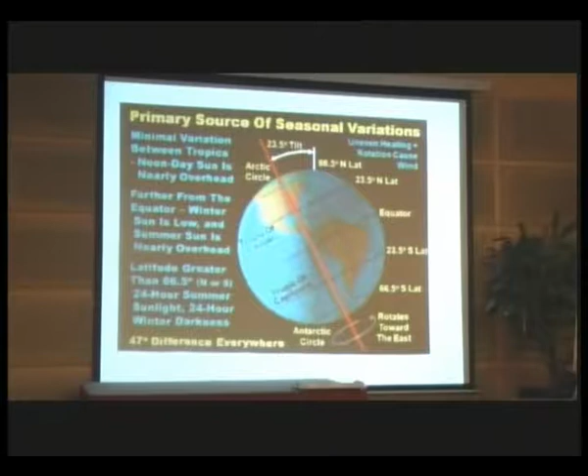Okay, like Dr. Tan mentioned, the world is rotating, it is at a tilt of 23.5 degrees, and because of the tilt, we have variation of the position of the sun throughout the year. Every day the sun comes out from the east, moves up, and then sets in the west. But throughout the year, it moves from the south to the center, to the north, and then back to the center, to the south again. This is because of the tilt of the earth. And we have translated this into what we call a solar chart.

And with this solar chart, we are quite lucky because we are near the equator. So it is fairly balanced. The number of months the sun is in the northern hemisphere is almost equal to the number of months the sun is in the southern hemisphere. But if we are in London, this one will be more like that, it will be down. Whereas in Australia, in the south, it will be more curved outwards. It is due to the position of the location.

And traditionally, we use a shadow angle protractor to find the angle of the sun, the position of the sun in terms of vertical and horizontal location. Of course, this is some data about Malaysia. I don't have to go through this. Okay, let's go to the first strategy, orientation.

As we said earlier, we try to avoid facing the east and west, but we cannot avoid having the walls. So we try to avoid the openings. We cannot avoid the roof from facing the sun, because the roof is the largest area for a low building. For a high rise, it will be slightly different. For a low building, the roof is the largest area that receives the sun, and therefore it is important to consider insulation, not only to the roof but also to the walls, especially the walls on the west.

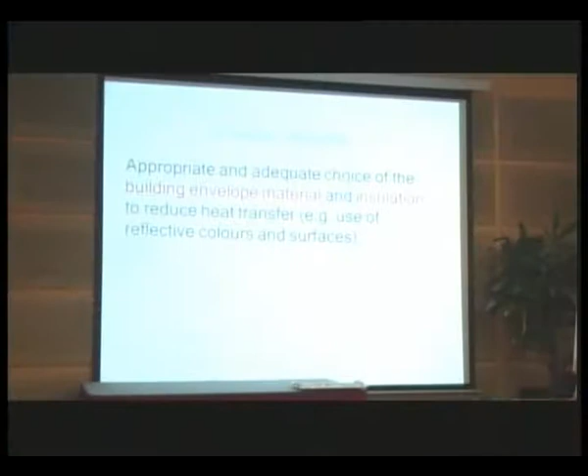Okay, the next strategy is to insulate. This aspect maybe I'm taking slightly longer because I feel there are some misconceptions in terms of insulation. Building materials themselves are insulation, but sometimes they are not enough. We need extra insulation even to the walls, but especially so to the roof for low-rise buildings.

Okay, this is just some concept about how to deal with heat. We have heat sources, we have heat sinks. The heat sources are the sun itself, the air, and the activities in the internal area of the house. And the heat sinks: the sky, the air, and the earth. And we have the modes of heat transfer: conduction, convection, radiation, evaporation as well. Evaporation is seldom; normally we will talk about the three aspects: conduction, convection, radiation. Evaporation is less discussed.

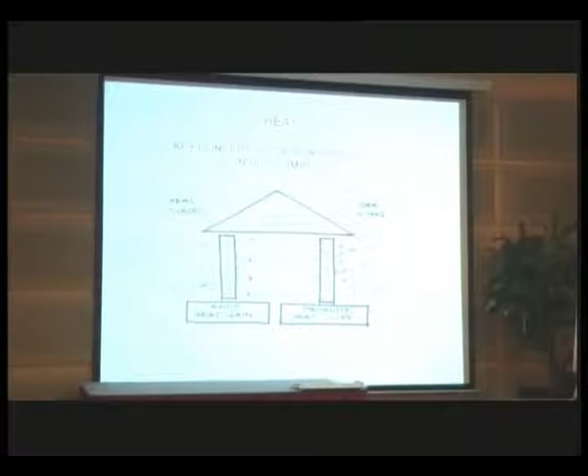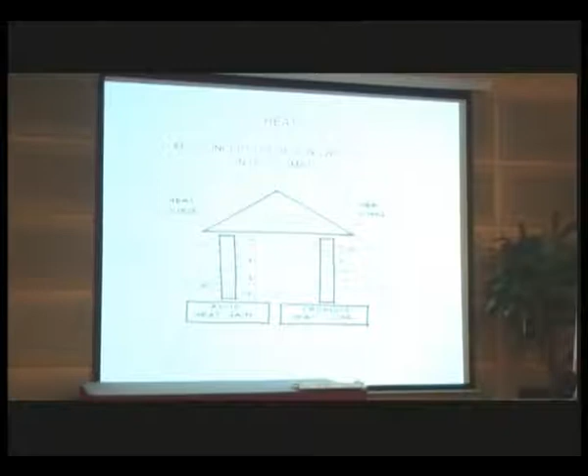So we want to avoid heat gain. So we want to discourage the heat flow from air by conduction into the interior, from the sun into the interior, and also heat developed inside. And we want to encourage heat loss from the interior to the sky, from the interior to the air, from the interior to the earth. These are the heat sinks. This is just a basic concept.

And this is something that maybe I would like to make a point. Almost all of us are quite unclear sometimes that the most important heat transfer mode is radiation, as far as houses or low-rise buildings are concerned. Because of the three heat transfer modes, radiation takes up about 87% of the heat that is contributing to the interior of the house. And the heat in the roof is always very high if you do not handle it properly. It can go up to 57 degrees, definitely over 40. And this is where sometimes the correct insulation will make a difference.

This is the way the modes work. Conduction will be horizontally through the material. It must have a material. It must have a medium, or carrier. Convection will occur from bottom to up. It's a flow of air. Hot air rises, it brings the heat. Cool air down there, and then hot air rises. But radiation is a surface to surface thing. From hot surface to the cold side. So this is something, it doesn't affect the air.

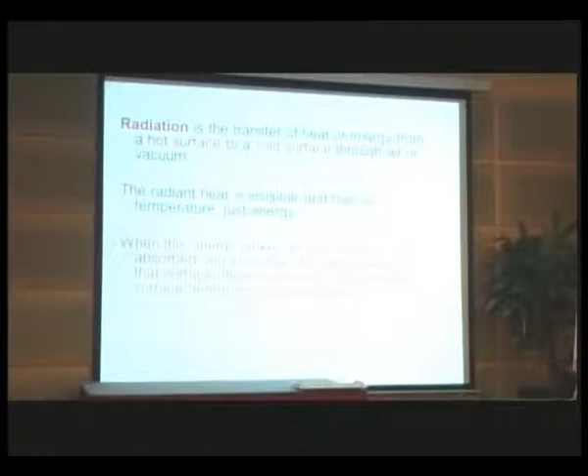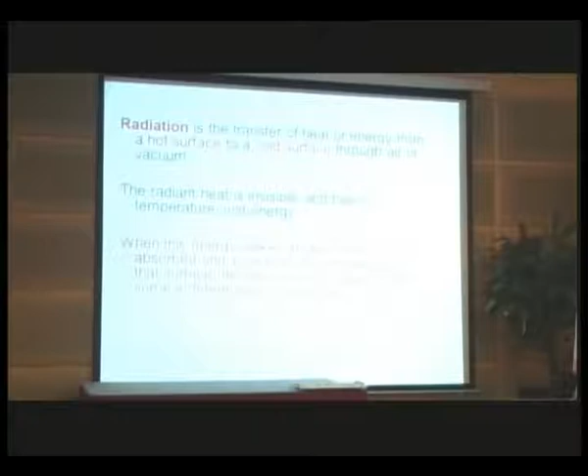So as I said, both conduction and convection transfer need a carrier or medium. Only radiation heat transfer can occur even in a vacuum. Of course, it can occur in air, but it can occur in a vacuum. Okay, the point here is the E value, emissivity. The radiant heat is invisible and has no temperature, it has just energy. When this energy strikes another surface, it is absorbed and increases the temperature of that surface. The emissivity, the E value, just now we mentioned low E value and so on. The emissivity of the surface determines the absorption and also the emission. We'll see later on what it means.

Okay, maybe this diagram illustrates it well. The sun hits a black surface, so only 0.03 of it is reflected, but 0.97 is absorbed. But at the same time, this black material can emit 0.97 of the energy quickly, because it is black. Whereas the other one, the silver coated block, will reflect 0.9 of the energy and absorb only 0.1, and likewise it will only emit 0.1. So the emissivity is very low. So these are the properties related to emissivity.

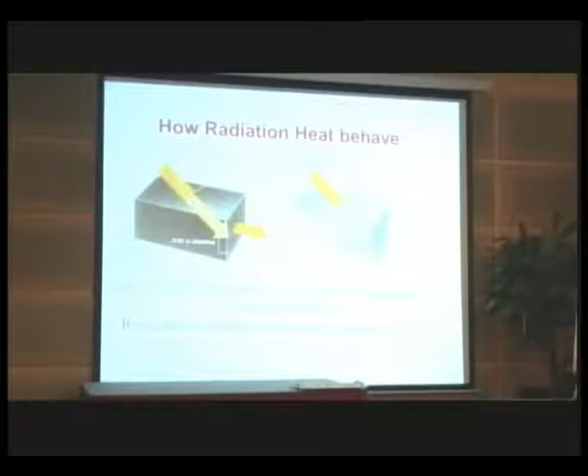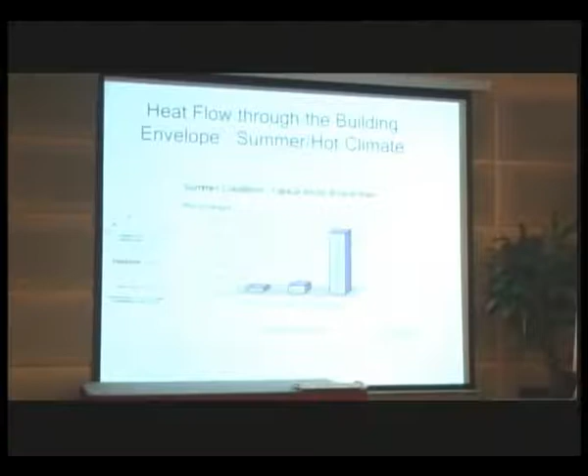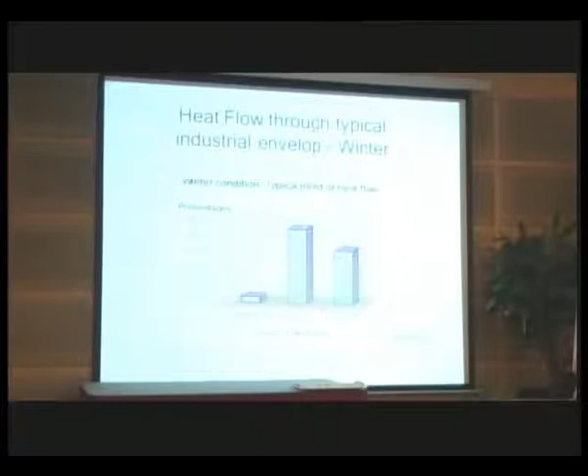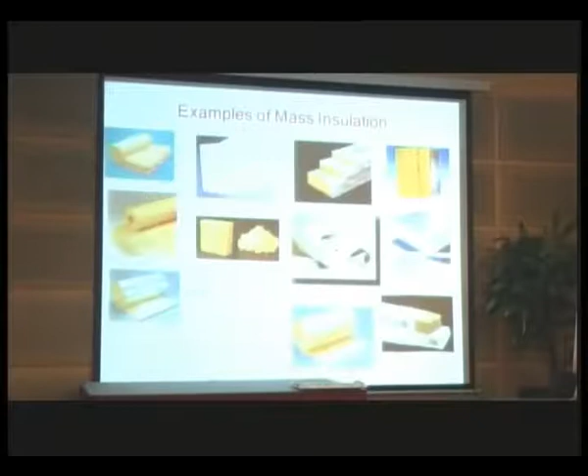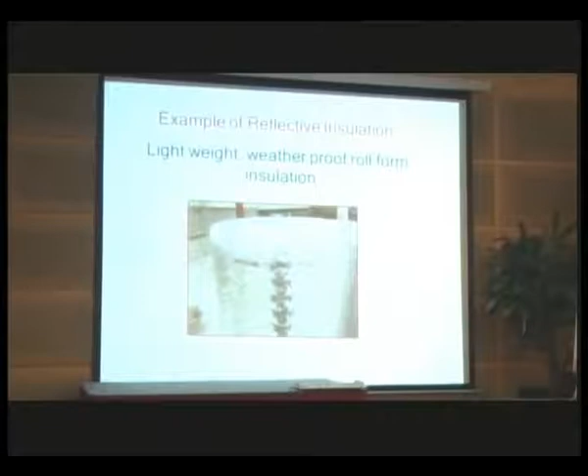And we go on to thermal insulation. Thermal insulation, there are two types. One is mass or bulk, which has got material density. The other one is the sheet, the reflective insulation. Of course, insulation we need throughout the building, not only the roof, the walls, and even the floors. These are bulk or mass insulation examples. And this is an example of the reflective insulation, lightweight, weatherproof roll form with the bubble.

Okay, the major difference between mass insulation and reflective insulation, as far as property is concerned, is that in mass insulation, the R value, the resistance value, depends on K value of the material plus the thickness of the material. Whereas the R value for reflective insulation depends on the surface emissivity and the air cavity that is trapped within two reflective surfaces.

And there is an important difference here when we talk about aluminium or reflective insulation. One is called reflective insulation, the other one is called radiant barrier. I was confused myself earlier on. I always took it that they are the same thing, but they are not the same. They are different. One has got R value and the other one does not have R value.

So the one called reflective insulation is defined as having one or more reflective air spaces in a closed situation. That means unventilated. Whereas the other one is just a radiant barrier, defined as having a shiny surface that is facing an open airspace. And this is typically installed in the attics, let's say on the ceiling, facing up and so on. And this does not carry any R value. And this is the confusion that has arisen in terms of calculation and so on.

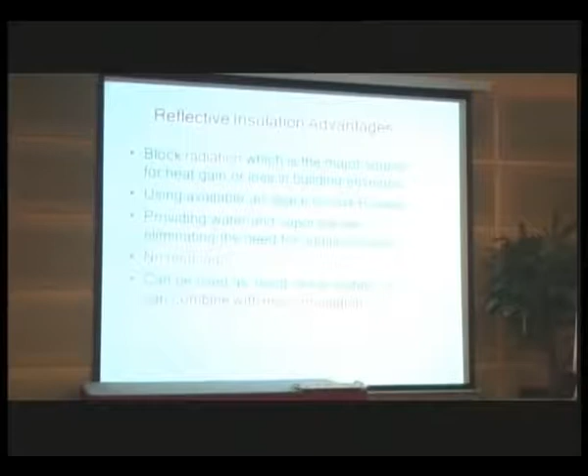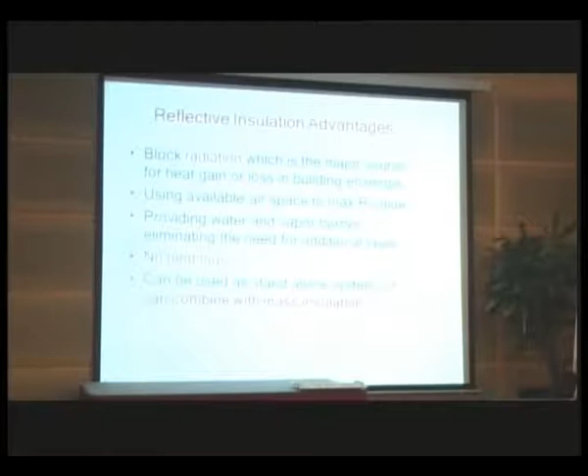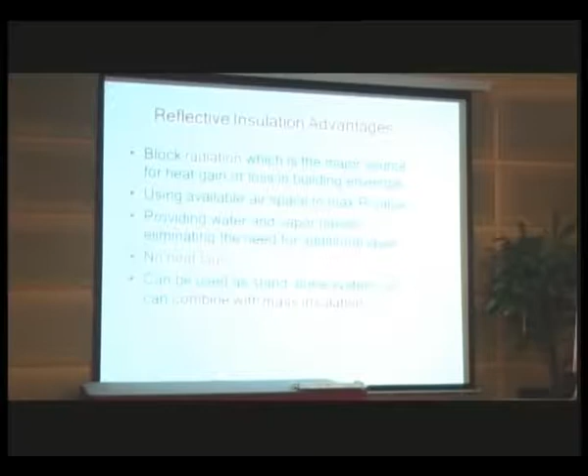Okay, but to me, we do not just put away our mass insulation. We can use both together, a combination of reflective and mass insulation, especially for metal roof, where we need also to consider noise. To dampen the noise, we need the fiberglass or rock wool and so on. So it is best that we combine the two in certain circumstances, but under other circumstances, it can be on its own.

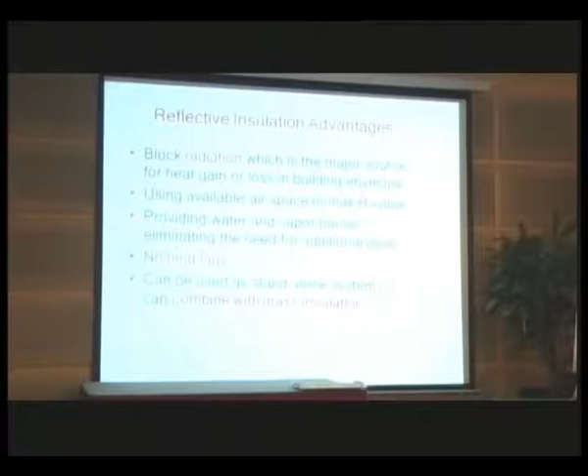So another one that is related to earlier on, aluminum foil. Aluminum foil is just a sheet. The sheet itself is not insulation. It has to come with air. So if we just use the aluminum foil on top of our roof, you will not get the effect of the radiation. You will not get the reduction in terms of heat from the roof. You have to have two sheets of aluminum, and in between you have to have the air, which is not ventilated. Then that assembly has got R value. Otherwise, it's just aluminum foil.

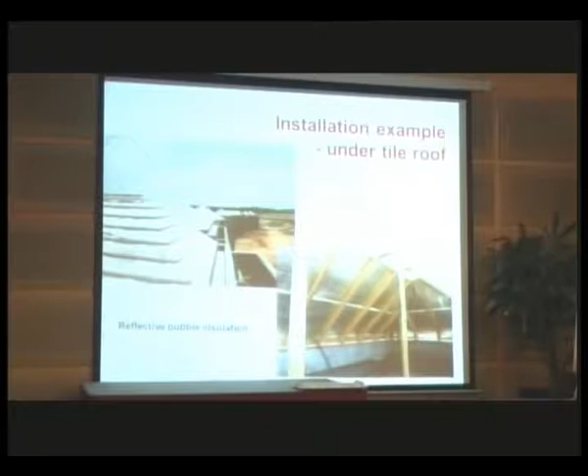These are some of the uses. Just an example.

Okay, the next one. How much longer, Mr. Matthias? Okay. Still have plenty of time.

Okay, the next one is ventilate. Ventilate is to remove the internal heat by natural ventilation, and also to increase the air movement indoor. 10 minutes, okay. Okay, this is my observation, and maybe many of us. Most Malaysian residential buildings are designed with air conditioning in mind. I think when they design it, they have air conditioning already, because it's quite cheap, very, very cheap. And we notice that there are minimum openings or non-operable openings provided, and these are mainly for daylight and view.

So like Dr. Tan mentioned earlier, he was mentioning about operable, we can close and open. The best is to have permanent opening, but of course at times we need to close, so we need to provide what Dr. Tan mentioned earlier, openings in the building that can be operable, because some houses have fixed glass. They have openings but fixed. You cannot open at all. We come to that afterwards. There's one house there.

And because of this, the house looks to us suffocating. They just have a small window for opening. There's nothing else. And we are just wondering, how is the indoor air quality in these houses? The aircon, okay. But what about the quality itself? Unlike in some traditional houses, especially in Indonesia, they have above the doors or above the windows, they always have openings. If you notice that, and that is very important. And this is why I have this. Okay, we go to this.

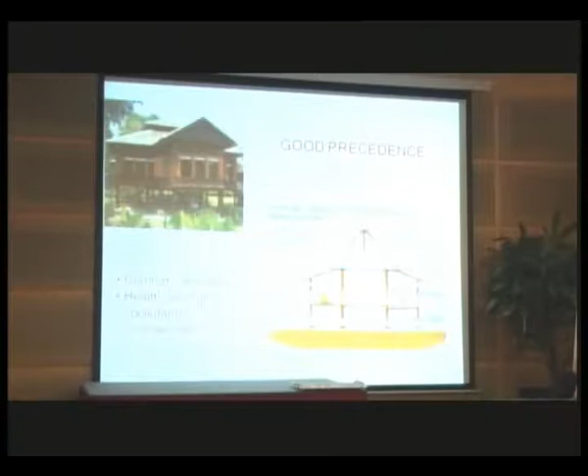Okay, that is why I have taken this house, this Malay traditional house. You mentioned earlier you would like to be in such a house. If we can learn from this house, look at the way the openings are provided. Of course, it's on stilts, but it has got openings there. Of course, the windows and so on, opening up there. I think throughout, that is something which maybe we can learn, we can provide in some ways. The principle is there, but how we translate it into modern design is something else.

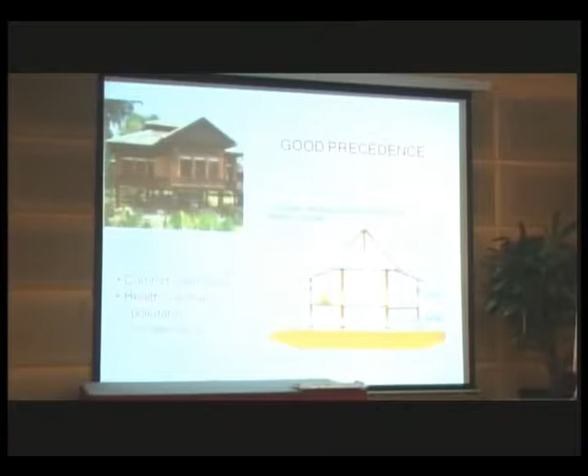So I have lived in a similar house like this, and at night it can be very, very cold, because of the radiation to the sky. Depending on the roof type, some are just zinc or aluminum roof without any insulation, so it can get very hot. But underneath, if we use even newspaper or anything to prevent the heat, it's effective. So ceiling and so on. But this illustration also shows us the basic principle of good ventilation in our traditional Malay house.

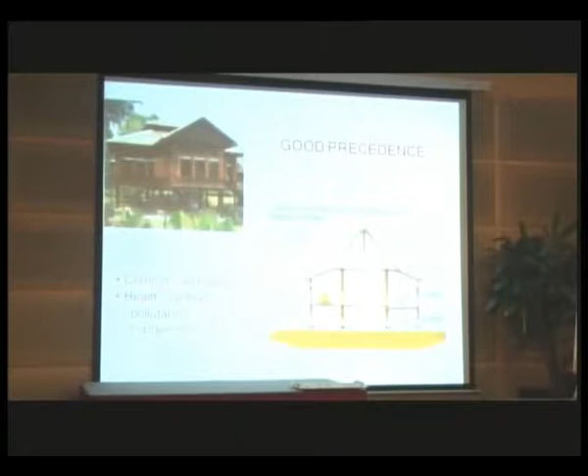Okay, talking about ventilation, apart from depending on the natural ventilation, we can also enhance the natural ventilation using some phenomena. In this case, we can try to use the Venturi effect to somehow encourage higher speed of air through some means. And also, there is another one which is called stack effect, buoyancy, depending on the density of the air. And this can be used in the chimney, and also in air wells or in atriums.

And of course, there is a lot of local research being done in terms of field measurement, field experiments. Wind tunnel modeling, I'm not so sure, but nowadays they tend to go more for CFD, computational fluid dynamics simulation.

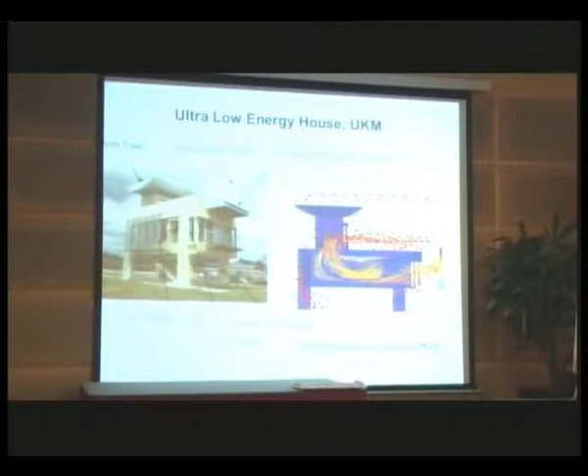And there's another one that has been done early on. This is completed. It's using a combination of chimney. This principle was used in the, is it zero energy building? Zero energy building, or the earlier one, the first one, in the center of the building, but not quite successful.

So what is being done here is that the researcher is trying to combine the concept of a solar panel there to heat up this place, so that there's hot air that will rise to give a larger temperature difference between this area and that area. So buoyancy depends on the density of the air, and the higher the difference, the better the flow. So there were some good results, and she applied this to a single-story shop house, of course by simulation.

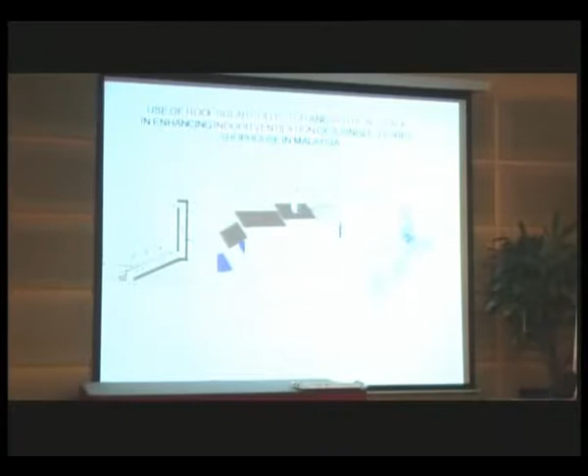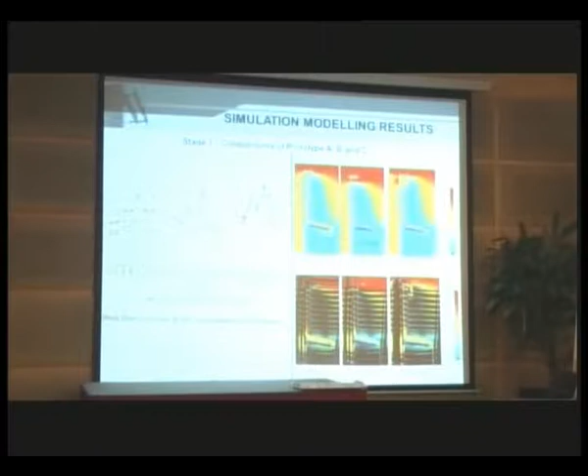The first one, she did some experiments to find out the configuration of the chimney and the panel, which is the roof actually, just painted black with a glass over it, to create that kind of high temperature to move the air, and then to find out the effect at the top. How it should be configured. Of course, she also did simulation, also about the shading, which orientation of the panel would be the best.

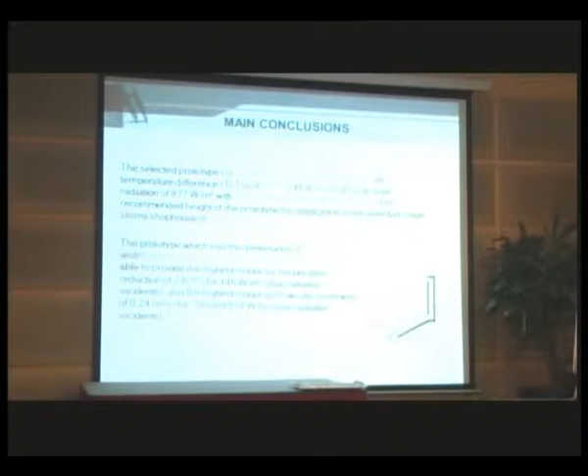And then she concluded that it is viable. Now, of course, this is an experiment. We need to do more research in order to make it really applicable. And she has applied it to the shop house.

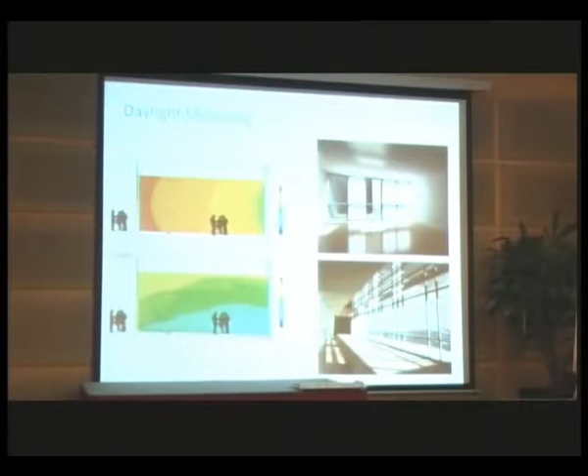Okay, the next one is on daylighting. I will not go too much into this. Daylighting, again, as I mentioned, our traditional houses are not really good. They're lacking in terms of daylight, good in ventilation. We have this available daylight, and then these are the many ways. There is a lot of information on this. We can use light shelves, as in the GEO building. And of course, as I mentioned earlier, we can now use light pipes where we cannot easily get it from the top.

And in terms of solar energy, we have the familiar photovoltaic for household appliances, lighting and so on. And we have solar thermal for hot water, even solar cookers. We are doing some work on this. And of course, now some people are developing PV and thermal, one panel that can do both. You can have electricity, you can have hot water, or even 3-in-1. The whole composite can be the roof product itself, so you don't have to buy any tile or metal roof. So this is being looked at.